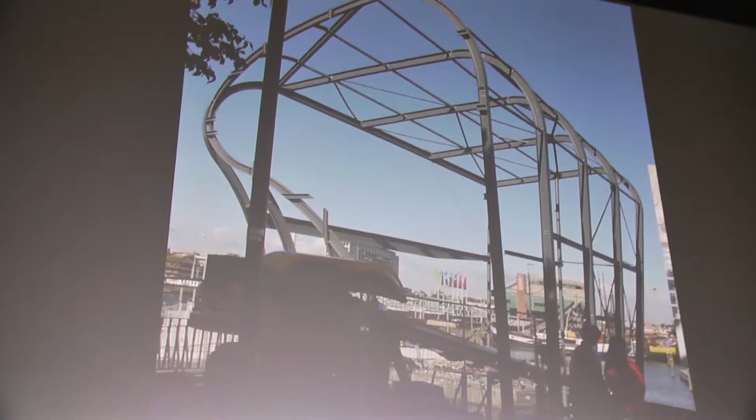This is a photograph of the Architectural Institute, and we had total freedom. The only limit was the budget. We made it a shape, but what we did, we just folded one plate, and that meant that we had a singly curved surface. By making the singly curved surface, we knew we could make a structure from straight beams and perfect curves. And that means any steel company in Holland could build it.

3 years before, we got a commission for a pavilion in Zeewolde. Zeewolde is a town in a rural area, and they were all farmhouses. Every farmhouse got a barn from the government, and that barn had a 3-hinge structure. That means you have 2 hinges at the bottom and 1 at the top. What we did, we just shifted the hinge. That meant we could make a structure which we could twist. We could rotate the trusses, and therefore we could make a warped building.

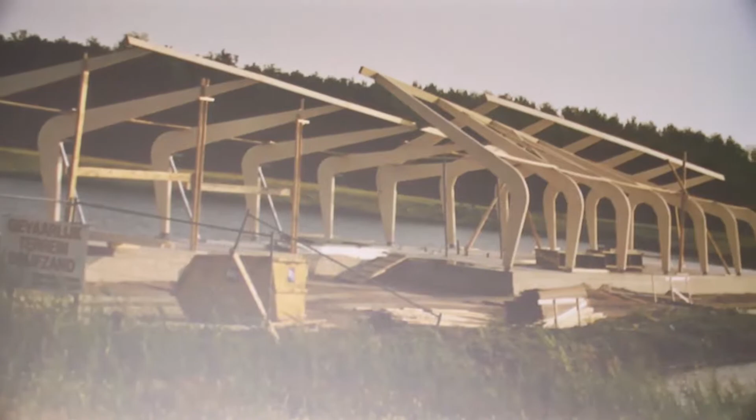3 years after the Architectural Institute, we got a commission for a pavilion in Roosendaal, right in the center of town. Our client wanted to have an egg-formed pavilion. Also, the urban designer wanted that. To make an egg-formed pavilion, you have to be really careful that you don't make a very complex structure. So what we did, we just put a 3-dimensional rectangular grid on top of it. So at least 80% of your floor plan will be straight, and you only have the sides which are curved.

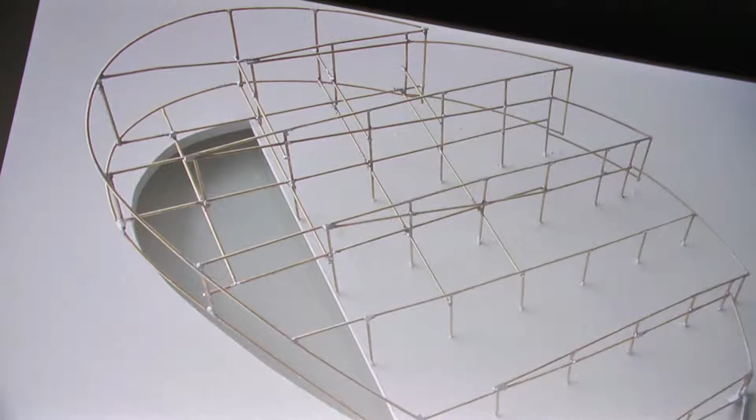And then we started playing with the structure. We lifted it up, and we got a roof where you could actually walk up on top of it and make a square on top of the garden, or the top of the square of the city.

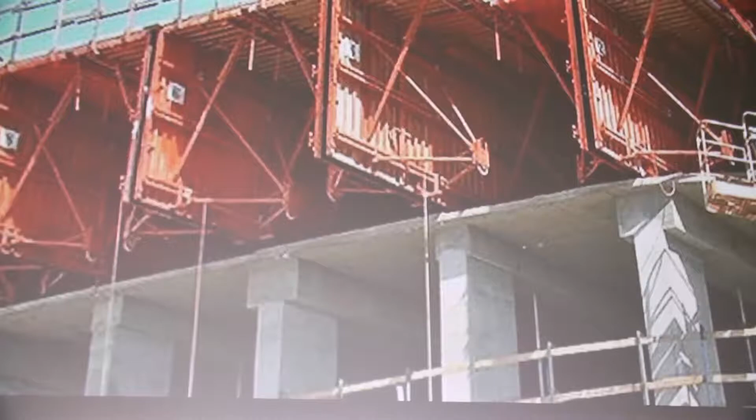To work with the building production technology, you have to know how the system works. In 2003, we got a commission for our first apartment block. We never built apartment blocks before, so we did some research. And we found out the cheapest way to build apartments in Holland is to use a concrete structure and a tunneling system. A tunneling system is where you have two ends, and you put them next to each other, and then you can cast the floor and the wall in one session.

And that goes very fast, and therefore is very cheap. If you look at the qualities of that tunneling system, it's very rigid in the width and the height. You can't change that, but you can very easily change the length. So what we did, we made a structure where you have a fluent front and a fluent back side of the building.

To be honest, this was only 4% more expensive than a rectangular one. But it's never the structure which is the problem, it's always the skin. The structure is more or less two-dimensional, the skin is always three-dimensional. You have to stretch the skin to close the wall.

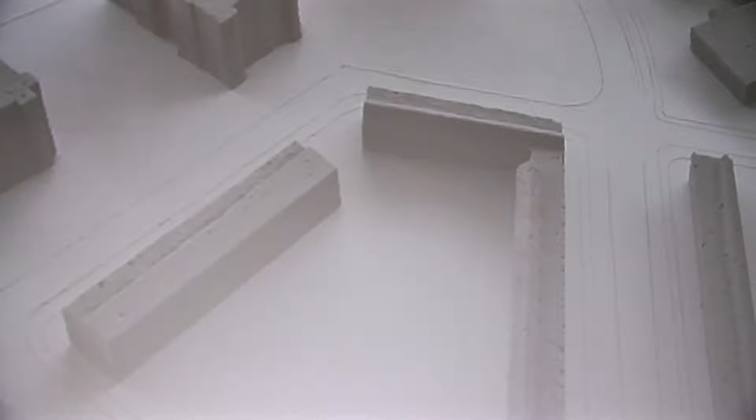At the moment, we just finished another apartment block, in Hilversum. When we start a project, we always do research on the site. We walk to the site, see what's going on, get a feeling of it, then go back to the office, make a 3D model of the surroundings, and start playing with models to see what could be on that site. So we made a block like this, a plaster block, and just from this we knew we had to make an all-sided building.

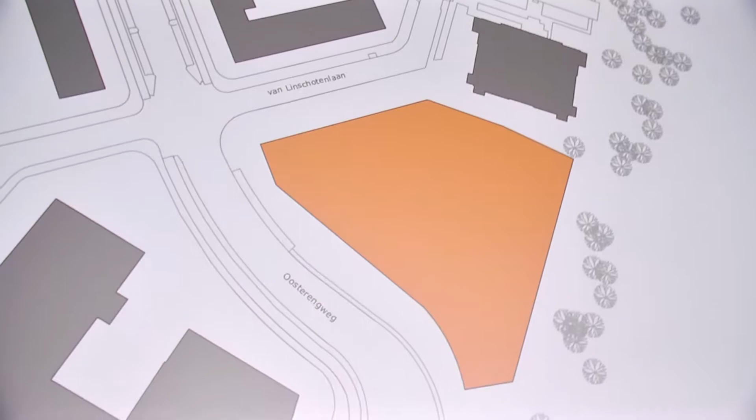Then we go back to the data. What does the client want? In this case, he wanted 55 apartments to make the project feasible.

Then we took the information of the city, and we found out that all the main infrastructure of the city was going right through our plot. We were left with a very small surface where we could build. We were allowed to make 11 stories high, which meant we could only make 44 apartments, not 55.

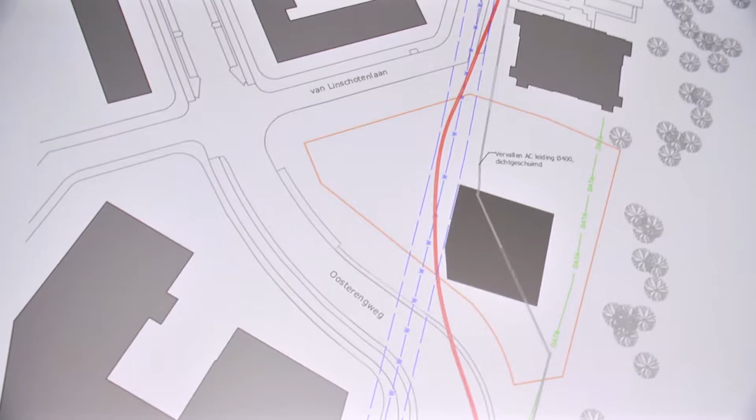So when I saw that, I went to my client and said, okay, we can only make a building which looks like that, otherwise it doesn't fit. The client agreed, and our first design was actually a design like a hurricane came. The balconies were stretching out, and everyone was really pleased.

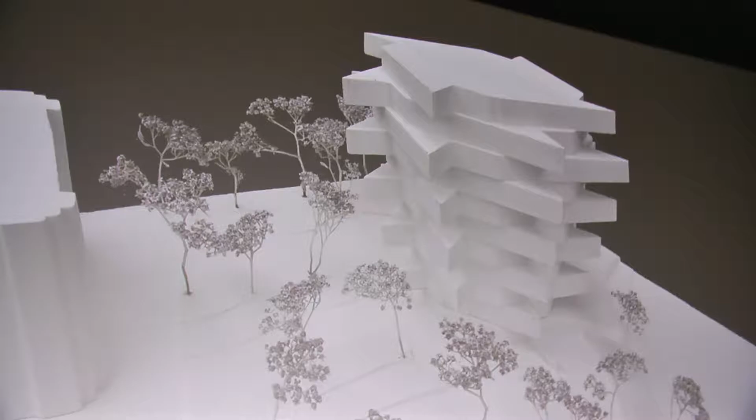The only problem was this project started in 2004. In 2008, all the working drawings were finished, and then the crisis came. We had to cut the budget again, which meant we had to make a new design.

For the new design we used the tunneling system again, but we couldn't leave it as just the tunneling system. We made a cross in the middle and extended it to the outside. In the end, this was the render the client's office made. The building is now just finished - this is the final building.

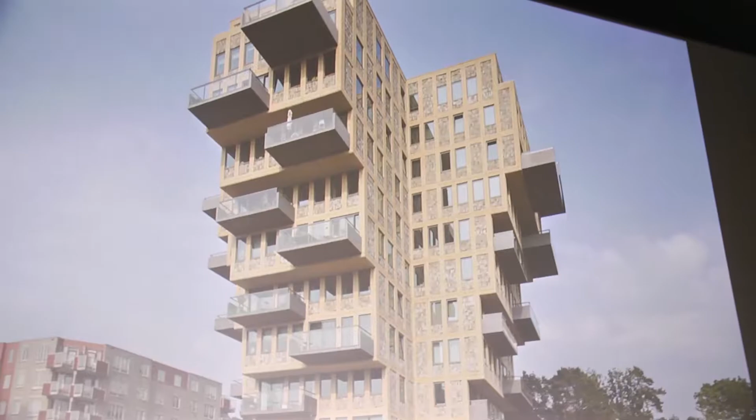In 2006, I was a professor at the Technical University in Eindhoven, and I attended a symposium like this. I told my audience what would happen if we could print houses in the future - if we could print buildings, that would change architecture dramatically.

At that time, that was 2006, the whole audience was laughing, thinking that's not going to happen in 100 years. But only two years later, Enrico Dini, an Italian entrepreneur, had a printer which could print 3 by 3 by 3 meters. Two years after that, he had a printer which could print 6 by 6 meters, and that's already the size of a house.

Dini's system was a system of layering. You put a layer of dirt down, you put a resin on top of it, and you put another layer of dirt down - that's how he builds it up. The advantage of that system is you can make anything you want. The disadvantage is that it's very slow.

Now, 10, 15 years later, a lot of universities, including ours, have 3D concrete printers, and they're experimenting, so it's moving very fast. Those systems are more extrusion-based. This is a Chinese system, and they claim they can print a house in just one day, so that's very fast.

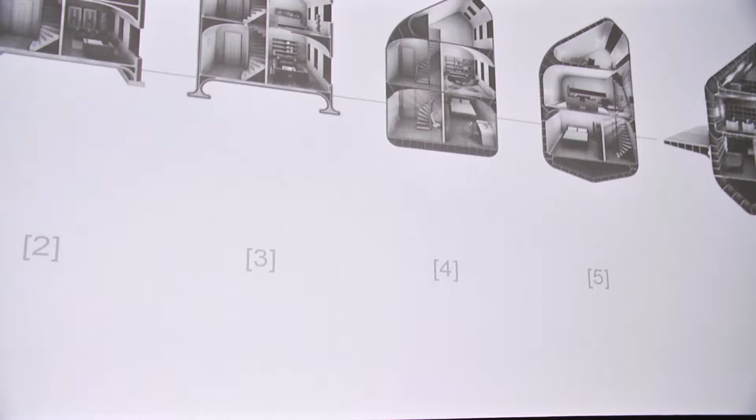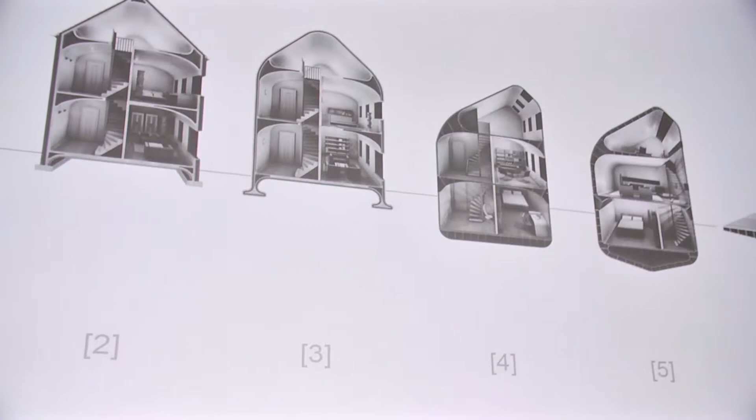When I retired as a professor from the Technical University in Eindhoven in 2010, I asked my students to make a sequence. I told them a 3D printer could change architecture dramatically, because it's a whole different way of building. I said, why don't we make a sequence starting with a typical Dutch house, showing the steps of what will happen if you 3D print a house.

Probably the first thing you're going to print is the structure. And if you print the structure, it's very unlikely you're going to make a straight line between the walls and the ceiling - if you make a curve, it takes less material and is structurally stronger, so why wouldn't you do that? The second step is if you get more nozzles on a printer, you can probably print the structure, the insulation, and the exterior wall together, and that means the building becomes even more fluent.

Sorry, can I go back? No, I did something really wrong.

The fourth step is, why would you bring all the materials to the building site? Why can't you just use the dirt which is there, put it in the machine, put glue with it, and just make it from the local materials?

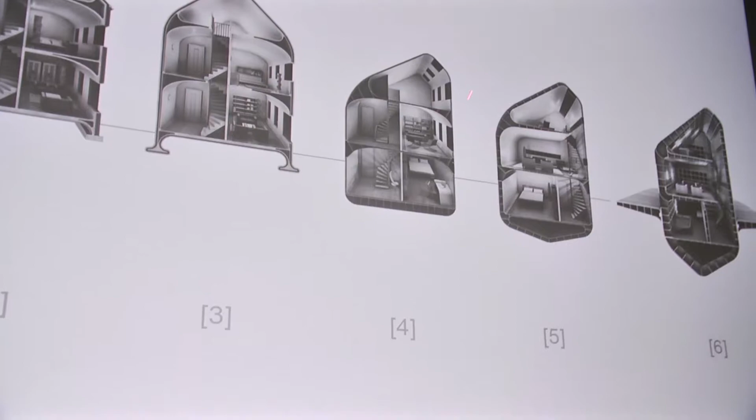And the next stage is just, why doesn't the building become autarkic, so self-sufficient? And the last one was something typically Dutch. 50% of Holland is underwater, which means we pump every day to keep the water out. What happens if we stop pumping and just make floating houses?

That was the end result, what we had with students. And we really tried to have a kind of evolution, starting from the apes and ending up with the final building. And people often ask me, Rene, do you think houses are going to look like that in the future? I have to be honest, it is very unlikely.

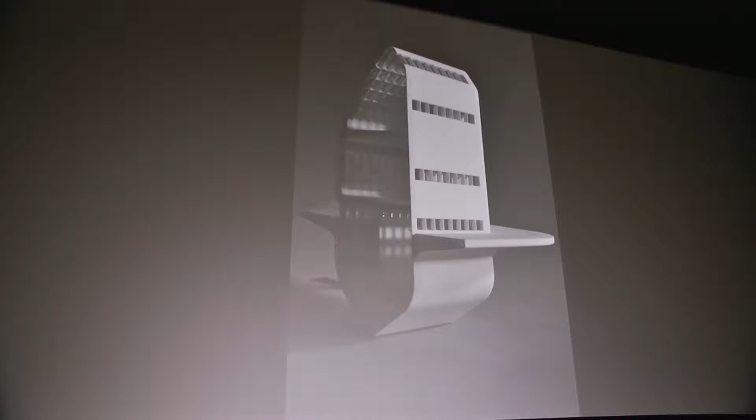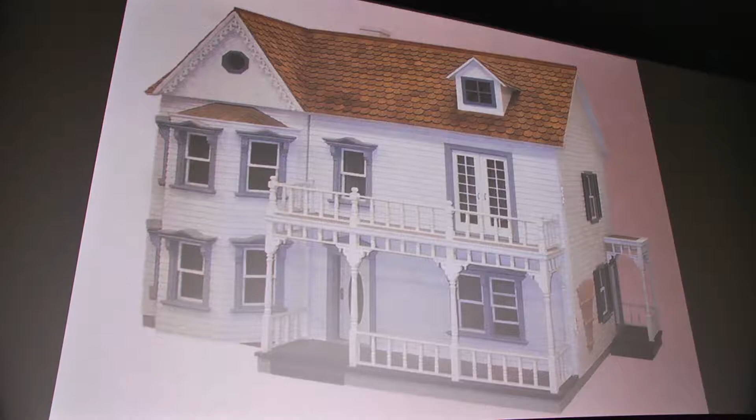If you look at all the innovations we have in the building industry, it hardly ever leads to another kind of architecture. So it's very unlikely that the house of the future is going to look like this. It's exactly the same as we always had, just from another material in another technique. Like we do now with the windowsills, the aluminum profiles, and everything is actually transferring to the old and going back to the old system.

And that's exactly what the Chinese company does. They printed their houses, and this is what they sell. They don't sell a new kind of architecture. They sell their old architecture built in a new way, with the problems they had before.

Normally, if you look at the set of rules we have within architecture, an architect is more like a collector of techniques and materials, and what he does is just make a composition. If it becomes more difficult, more complex, if the building becomes curved, the industry is going to punish him with a very expensive building.

Once you start printing, that set of rules is changed. A printer doesn't care how difficult the design is. The printer just wants to know, do I have to put a spot of material here, or do I leave it open? The only three elements which are important for a printer are: how much material do I need, how much does the material cost, and how long does it take to print? Those are the new set of rules if you print.

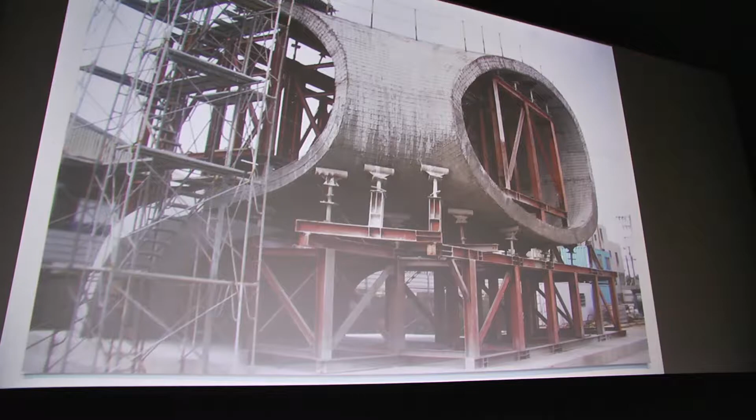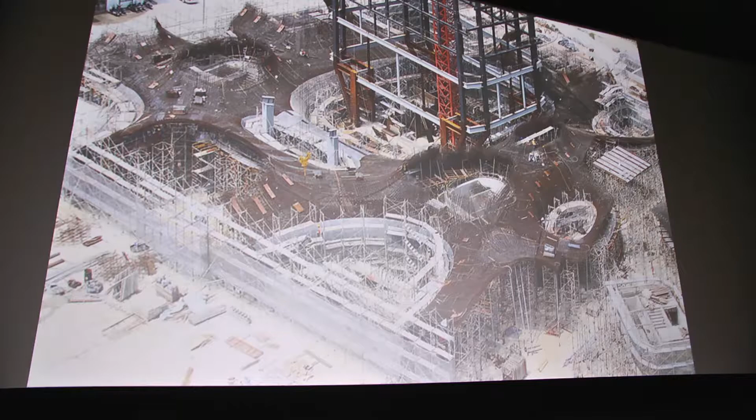And really, why would you print buildings if they're just rectangular buildings? The current building industry can do that much better than a printer ever could. But what if you're asked as a contractor to build this? This is almost impossible to build with the rectangular elements from the building industry, and a building site like this is a contractor's nightmare.

I'm going to the EPS, to the polystyrene.

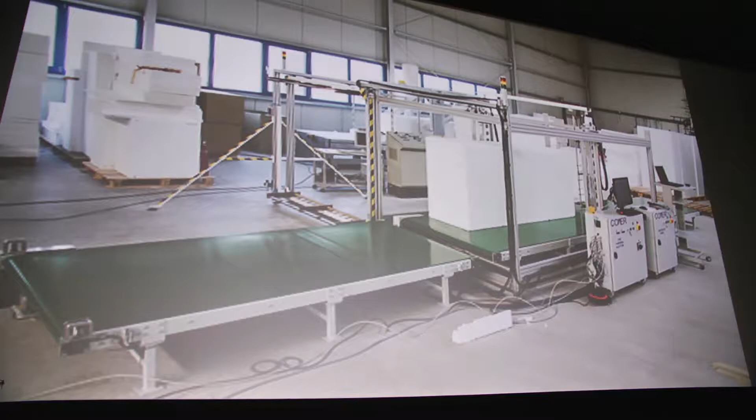After I left the university, I went back to my office, and I was really eager to start making projects which were 3D printed. The only problem I found is that to implement that would take at least 10, maybe 50 years, and we needed to build projects now. So we looked for another technique, we looked for another material, and the material we found was polystyrene, EPS.

The nice thing about polystyrene is it's a very cheap material, and with a hot wire cutter you can cut any shape you want. You can clad it with wood, and then it becomes a sandwich panel. You can plaster it, and then it becomes fire protective. You can spray it with hot spray, and you can really make smooth objects of them. And you can spray it with concrete, and then they become structural shells.

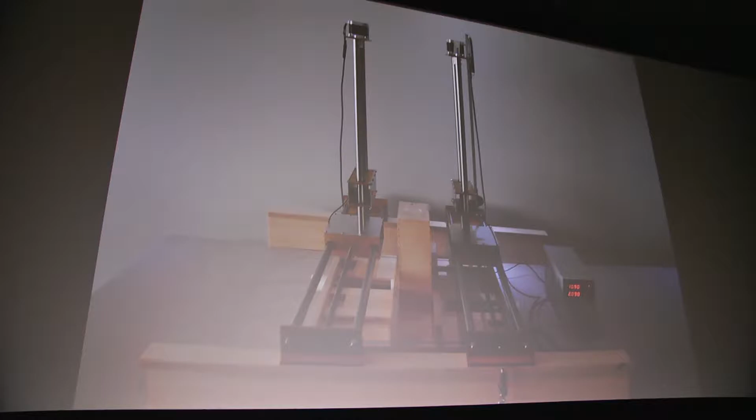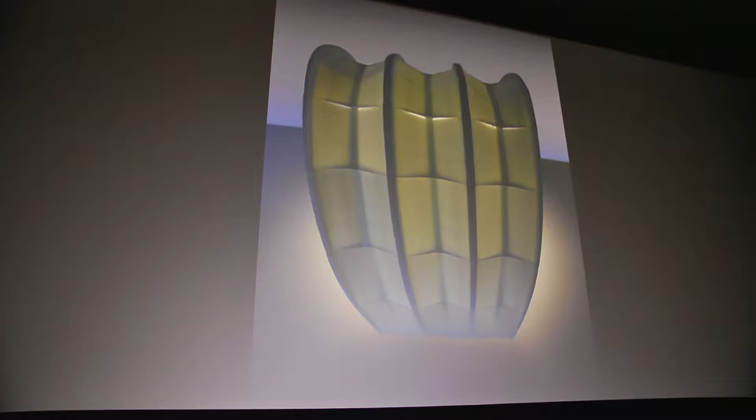So the first thing we did is we built a hot wire cutter at our office to make models and to experiment. The first experiment we did, we made an arch. We cut an element like this - this is 3D cut, so this is a warped element - and we made this arch. We were really pleased. We thought, okay, this is a beautiful element. It was translucent, and we thought this is perfect.

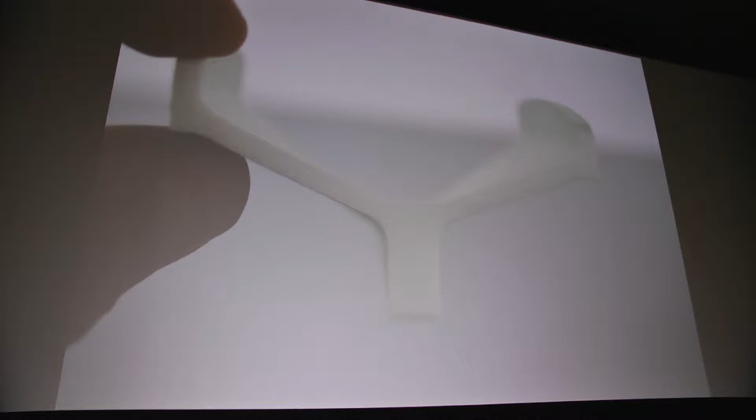The only downfall was when I looked the next morning at the amount of waste we produced. We cut this element out of a block, and we were actually not producing the arch as the main product - as a side product, we were cutting almost 80% waste. And that's what you see in most of those projects.

This is the arch, and that's the waste. And if you have a new system, a new technique, it will never be sustainable if you only produce waste.

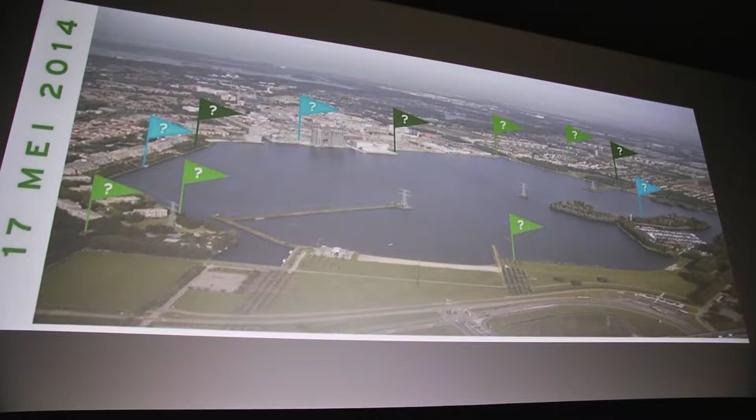So we started looking for another system, and we started entering competitions, because that was nice — you have a client, and if you win, you can build it. The first competition was a track in Holland around a lake, and all kinds of projects came in on that. We chose the project of a chapel.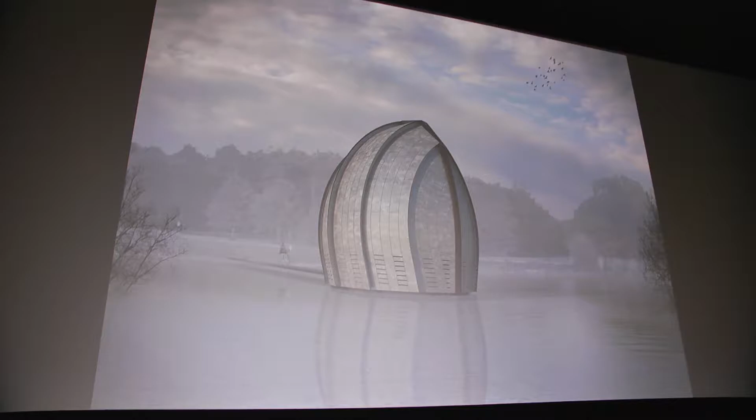But still we had waste, and we didn't want to have waste. So we looked for another system. When I looked for that system, I thought, okay, when I was young I played with a toy which is bucket in bucket — you probably know the little buckets on the beach. If you put them on top of each other, you can store them very small, but if you stack them, they're 7 times the original size.

So we looked for another competition, next to a castle, and they asked for a folly. The design we made was the copper room, a room to exhibit in. We started with a square ground plate, and we morphed the whole form to the silhouette of the castle at the top.

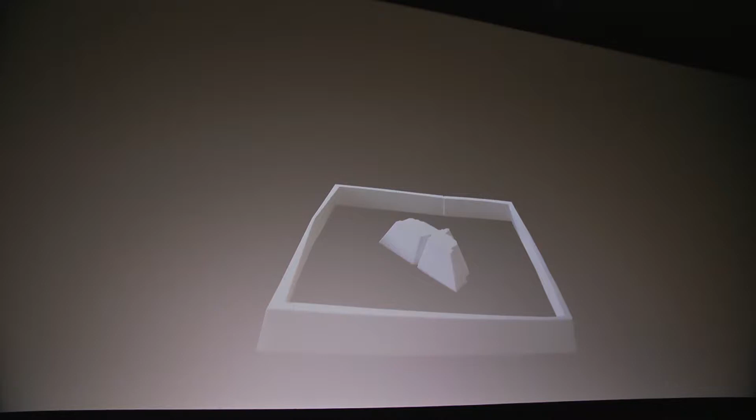We did this with software — Rhino and Grasshopper — so we generated the elements by computer. Then we cut a square plate, starting with a square piece of EPS foam. We cut under an angle, and in such a way that we could stack all the elements on top of each other. That meant we could make a pavilion with a free form, without any waste.

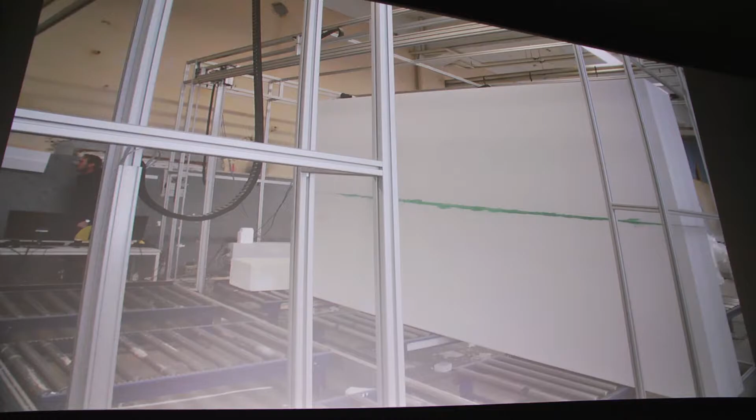We won this competition and could build the pavilion. We used the same data on our machine at the office — a big machine able to cut blocks of 5 meters by 2.5 meters high, and in this case 50 centimeters deep.

It took only an hour and a half for the machine to cut half the pavilion, so in one day it could cut the whole thing. We cut the pavilion, and you can just take out the blocks and put them on top of each other. They're light, so you can easily build it out.

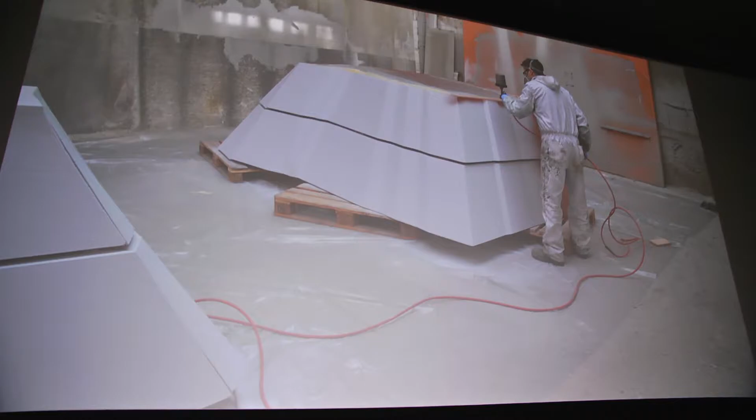Put hot spray on the outside, then finish this with a copper coating. The copper coating is 80% pure copper and 20% polyester resin. If you sandpaper that afterwards, it just becomes copper — looks like copper, reacts like copper. It is copper.

The foundation is just a wooden frame, and we put the elements on top of it with students.

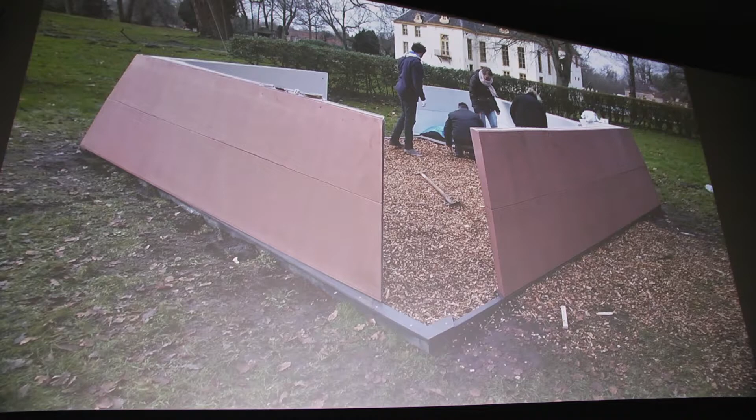Having made this system, we then started working on more complex designs. One of the designs we did afterwards, actually competition number 3, was a design for the pavilion in the sky. We thought, okay, pavilion in the sky could be about devils and angels, about the book of Revelations from the Bible, where Archangel Michael was fighting back the devils.

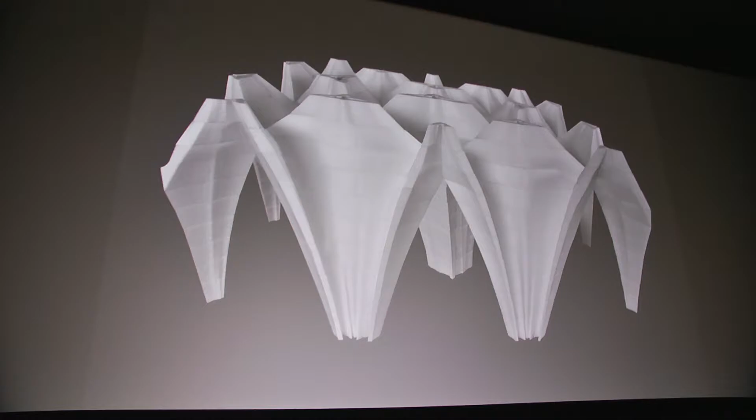The second thing we thought about was a graphic design by Escher, a Dutch graphic designer. What we did, we made the skylights from angels and the columns from devils. Again we started with a rectangular block, cut the rings out of that block, and erected it — out of that block we got this pavilion.

You see the angels at the top, and the devils are the columns which are in it. Two columns we took out to get an internal space. We didn't win this competition.

We also didn't win the fourth competition, which was in New York about the waste of material. EPS foam is a perfect building material — there's no animal in the world who can eat it, which means it will last for 100 years, and that's good for a building material.

So when we started with this project, we started with a square again. We wanted to have a free form, so we cut it into 4 pieces and rotated those pieces. We cut the angles out of it, and actually we made an iceberg there, out of a square.

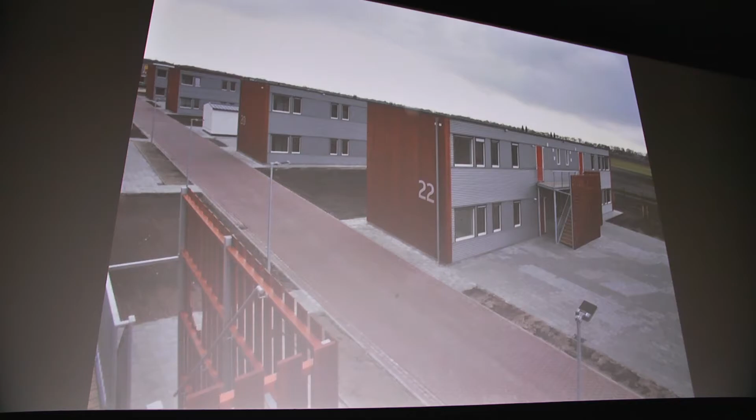Normally they put the refugees to live in houses like this, but these houses are only built for 2 or 3 years, and after that they're demolished, which makes a huge amount of pollution.

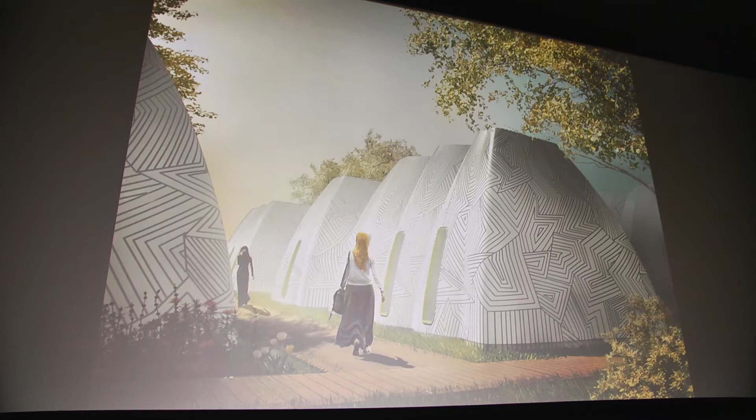So we gave them a solution. Why don't we make an insulated tent, an insulated pavilion from foam with a surface on top of it? The foam is reusable, the tent is reusable, so you can put it up instantly and tear it down instantly and reuse all the material.

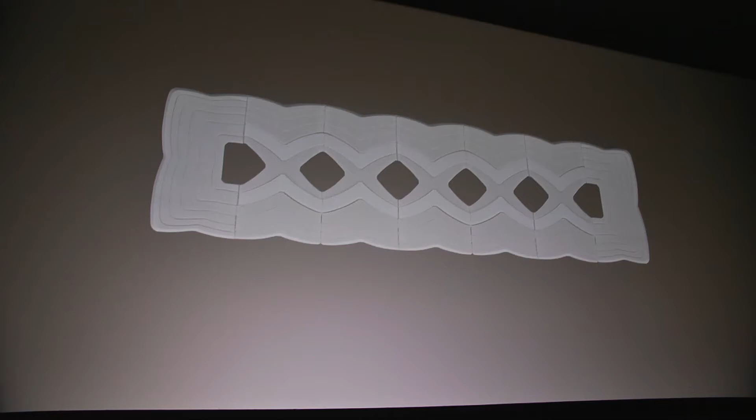We designed two elements, a corner element and a middle element. If you put two corners together, you get a small house for father, mother and 2 children. If you put two corner elements and a middle element together, you get 2 houses for 2 couples, only temporary for a few months. And if you put 2 corners with a lot of middle segments, you get single houses in between.

The nice thing about the cutting system is that everything is nested, so you don't lose any space. So the government can make boxes, store them, and when they use them, they can build them in a very short time.

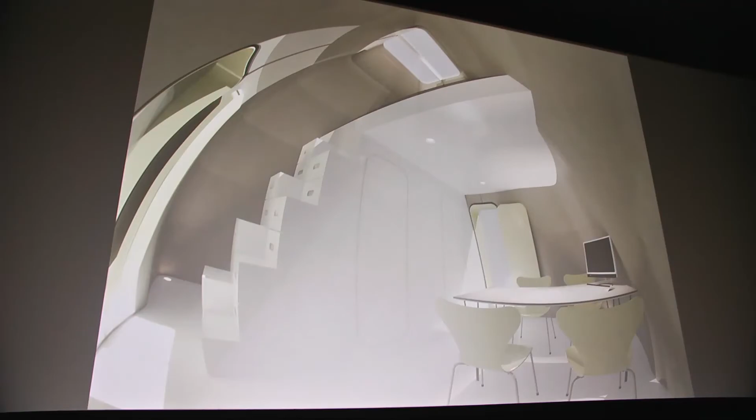This was the interior, and this was the final design we made with a foil outside so it would reflect in the sun and in the cold.

If you decide not to reuse them, you can make a permanent house for them. So actually those are quite nice houses, so you can use one as a garden house.

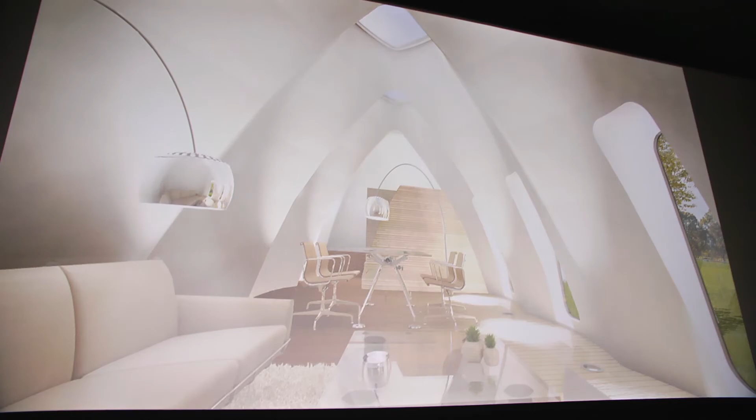Because we won that competition, we made a mock-up, and this was shown at a Dutch design week, where about 200,000 people came and visited the pavilion and looked at what it was, including the Dutch Queen.

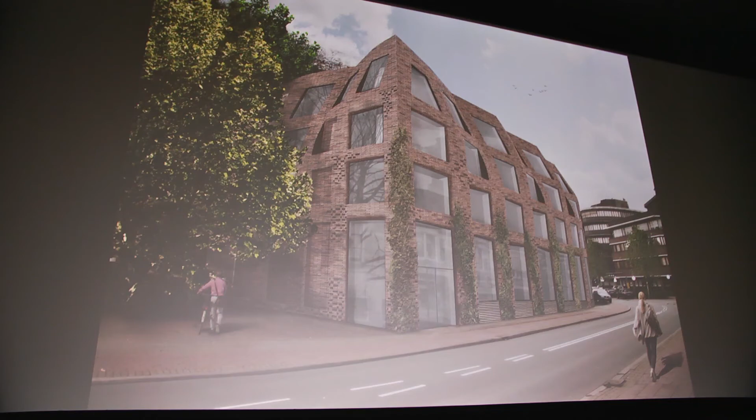We started with the foam cutting technique during the crisis. At that time, it was almost impossible for us to build the projects we were building before, because clients didn't want to spend the money on it.

The crisis is over in Holland. We survived the crisis. We took the material, EPS, because it's cheap, the technique is fast, and it was available, so you can use it instantly. We started experimenting, and we survived the crisis because we did a lot of infrastructure work.

So we started designing bridges and infrastructure works. Now we're building a bridge 130 meters long with a very special opening system, which hasn't been done in the world before. And we just made a bridge of 500 meters with a floor plan that curves around the water. But we still make projects with foam.

Just before the summer, we issued a building permit application to the city of Hilversum, where the first 3 stories are traditionally built, but the roof is made from foam, covered with slices of brick, and hopefully we get the building permit afterwards.